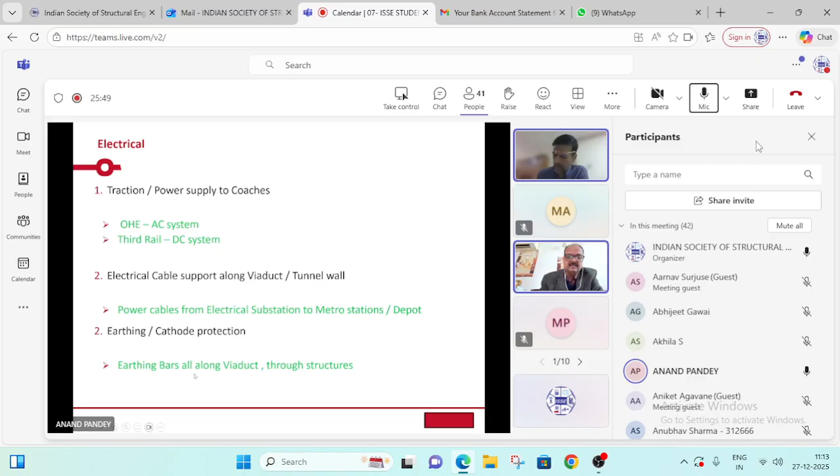Then S&T is signaling and telecommunication. Signaling is important for red green lights allowing the operation, and telecommunication for any issue - communication between the train operator and central command is very important.

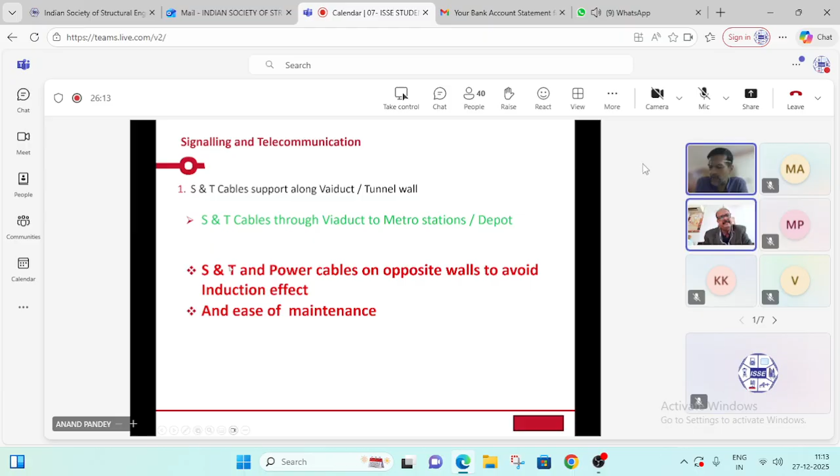One important thing: signaling and telecommunication and power cables run on different walls. I will show you in a picture. Signaling and telecommunications is low voltage, millivoltage and micro voltage, so it will run on one wall. Then electrical power cable, which is 110 kV, 33 kV and something like that, will run on a different wall. That's how the power is carried, and it helps in operation and maintenance as well as safety.

And it doesn't create induction effect, because 33 kV would create induction effect for signaling and telecommunication. Even in the station, the two rooms are kept minimum 10 meters apart.

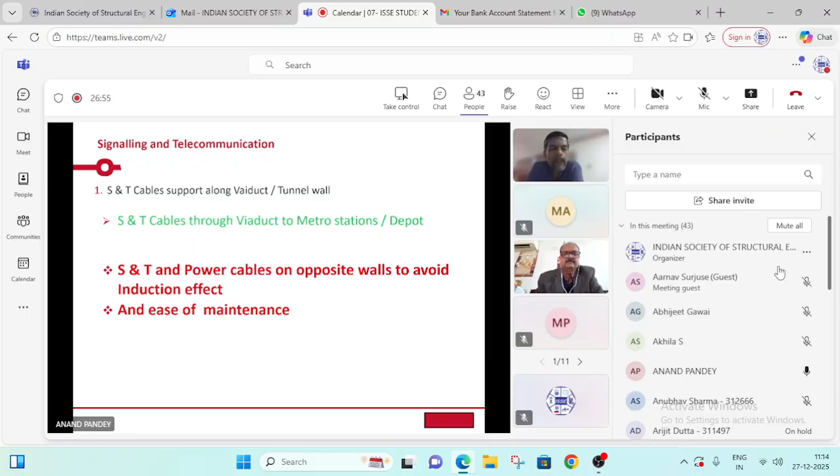And there is a 600 mm clear distance between wheel and any object. That also is very important - I will show you where. If due to any accident somebody is falling and the wheel is here, then this distance has to be 600 mm, so that even if somebody is trapped, it's safe.

You should remember, anybody needs 560 mm. Manhole is kept at 560 mm. 600 mm is for the person, for anything.

So this is a brief overall introduction to the metro, then I will come to the topic of underground metro. Now that's how an underground metro looks like. Now you people are lucky, you might have seen and traveled in it. When we started working on this, we had never seen it.

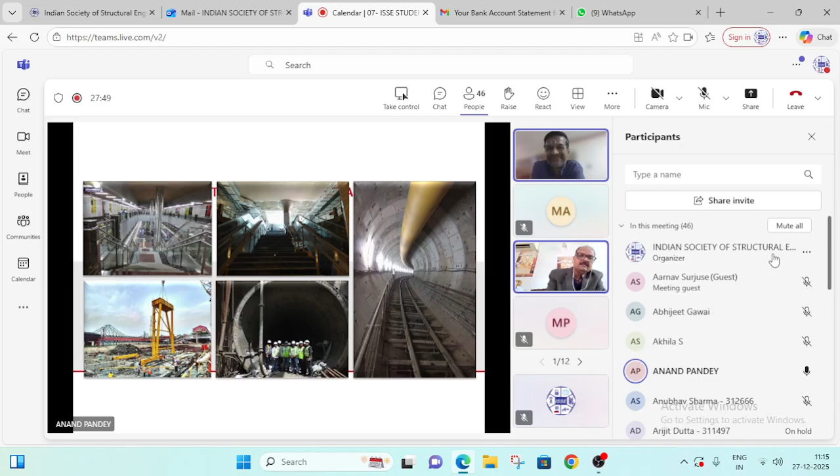So this is the TBM tunnel - it is the mechanized tunnel. You can see the segments of the TBM tunnel. Then the track is ballastless. This is the construction going on in Calcutta Metro. You can see the Howrah Bridge - that is the actual construction site.

These are the stations - from the concourse it is going to platform, and it is coming from concourse to platform. These are the people who are involved in the construction. Some photographs.

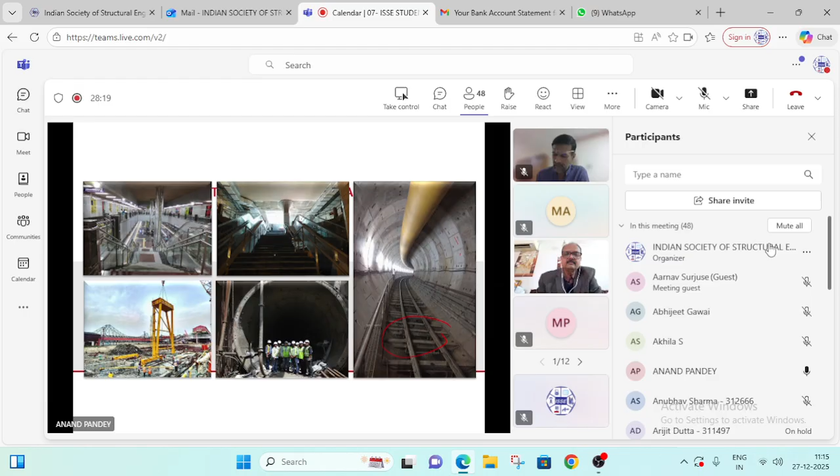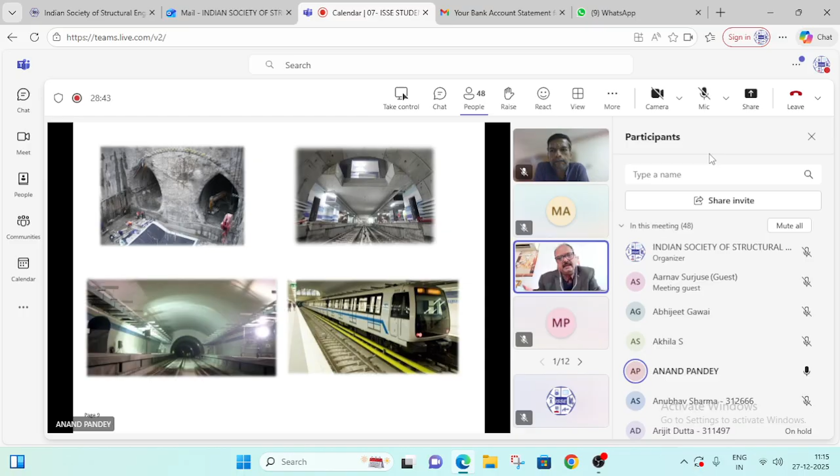So this is the thing. You can see the conventional tunneling and mechanized tunneling, which is normally called TBM, and this is called NATM conventionally. These are the stations created by tunneling method, and these are stations created by the normal cut and cover method. So stations are created by tunneling, by enlarging the tunnel, and by cut and cover also. That will explain.

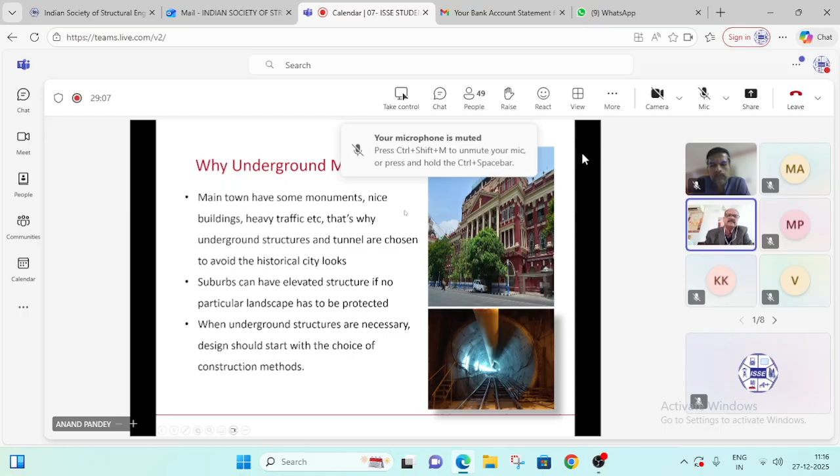Why we need underground metro and when we need elevated metro is a very important aspect to understand first. In the picture you can see this heritage building of Calcutta, the Writers Building. There is a tunnel created just next to it. I have chosen this photograph intentionally. Main town areas have monuments, nice buildings, heavy traffic, etc. That's why underground structures and tunnels are chosen to avoid spoiling the historical city look.

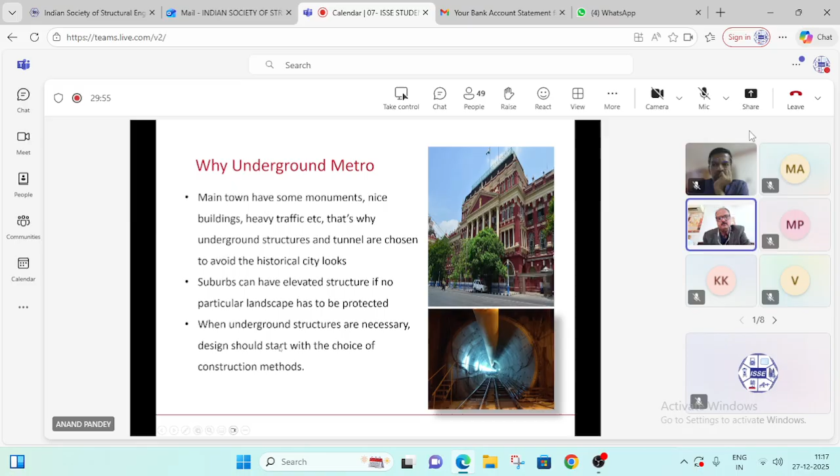During construction there are difficulties too, you lose space, and there are environmental aspects as well. That's why in congested areas underground structures are chosen. Suburbs mean a little bit outside the core city. You can have elevated structures if no particular landscape has to be protected. When underground structures are necessary, the first and most important thing is choosing the construction method. So after this broad introduction we will focus especially on the construction method.

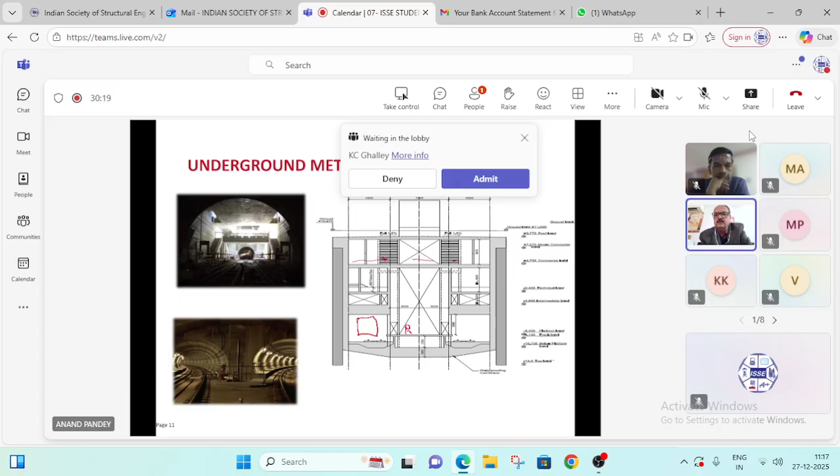Now this is a typical underground metro. The coach will be here, this will be the platform, people will be standing here. Then this is the concourse level here. It is different from the ground level, the roof level and the concourse level. Concourse level means where people enter, take the ticket, pass the entry gate, and enter the paid or unpaid area.

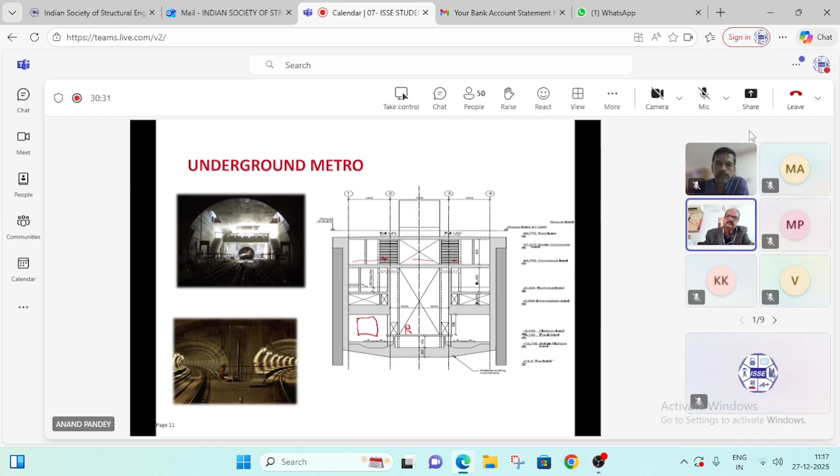In a metro tunnel, at a particular train, normally 1500 to 2000 people are sitting, and similarly a few hundred to a thousand people are waiting outside. So safety is very important. How is safety ensured? That's why power supply and distribution is very important, communication control security system is important, lighting, ventilation, heating and cooling, fire protection, water supply and wastewater are all important.

Imagine a situation when the train is coming and somehow catches fire, and it comes onto the platform where already a thousand people are standing, and the train itself is full of 1500 people. If the train stops here, then out of 2000 to 2500 people, everyone has to leave the station, evacuate the station within minutes for the safety of every individual, in case of fire or earthquake or something like that.

So every system in the metro - staircase, escalator, safety, everything - is designed to evacuate the whole 2000, 2500, 3000 people within 5 minutes. Every system has to start working automatically - the water sprinklers, fans to control the smoke, and everything. So that is very important.

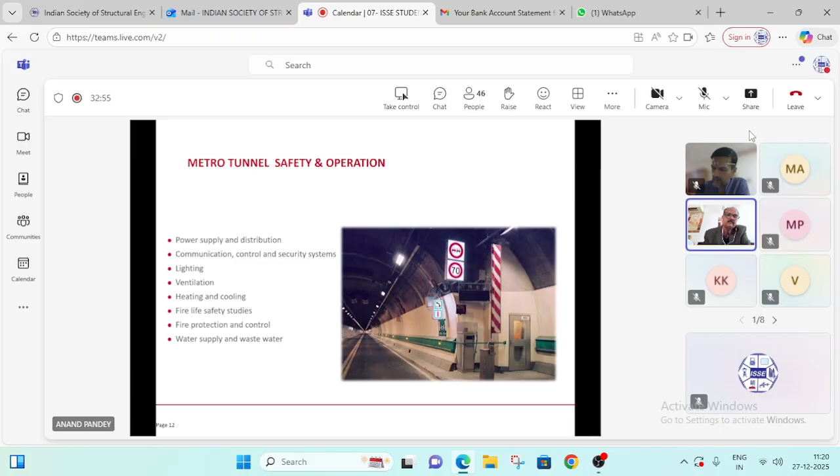Now in station planning, alignment is the first important thing. Normally it is kept on the straight alignment. Standard gauge or broad gauge coach is chosen at the start of the project in any city. Then, if it is a wall, how much clear width has to be from the train - this is the system requirement, that is traction, power supply to train, signaling and telecommunication. Then mechanical electrical services - air conditioning services, electrical supply, plumbing, fire.

Then egress calculation, what I was telling you - that 2000 to 2500 people have to be evacuated within 5 minutes. This is called egress calculation. There is a code, NFPA. From that criteria we have to calculate that all the people are evacuated through escalator or staircase within 5 minutes to a safe area. Then contract provision, employer's requirement - many things may be employer's requirement. Location, site visit, constraints, and technique is the construction method. So these things are important.

Now I will show you a typical section of the underground section. See, this is below the ground. It is normally 3 to 6 meters.

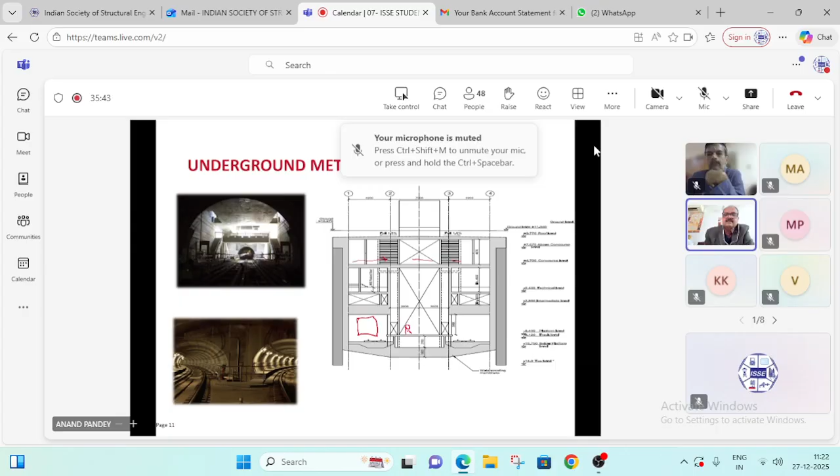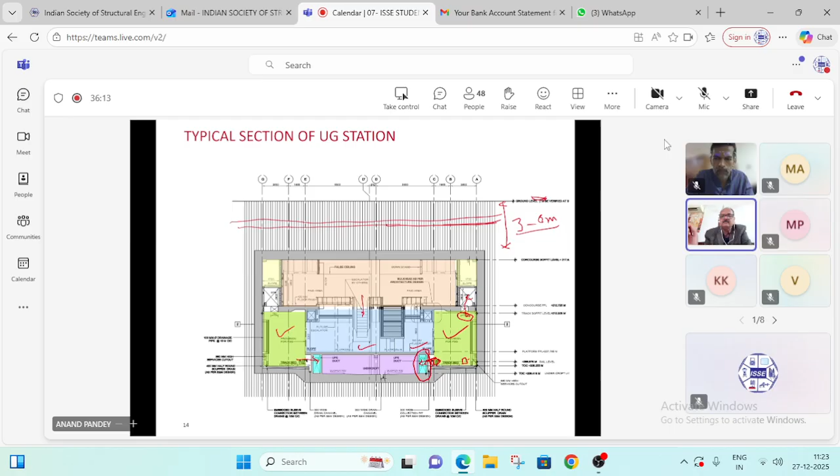In electrical systems, there is a pantograph on top. You can see this pantograph dragging against the wires, so it generates heat. This heat is also immediately taken out. We don't want the station to absorb heat - one heat from friction is immediately taken out, one heat because of traction is immediately taken out. So these two, we call over track exhaust system and under platform exhaust system.

Then under the platform, there's a lot of space. This is not wasted space - lots of cables: electrical cables, power cables, signaling, telecommunication, fire, water tank. The person has to stand here for maintenance, so this clearance has to be minimum 1.5 meters. So these things we see are complications.

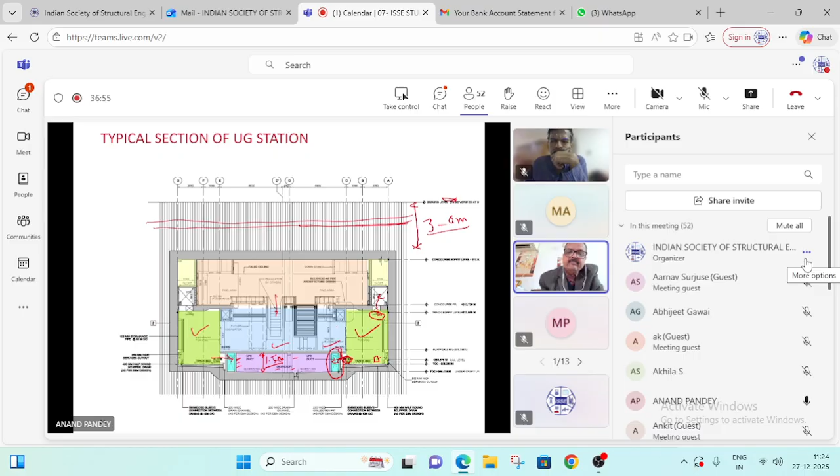As a user, you don't see this, but as an engineer, you have to see all these aspects. So traffic has to pass, sewer line has to pass, all heat has to be extracted so air conditioning doesn't get overloaded, and the public goes like this.

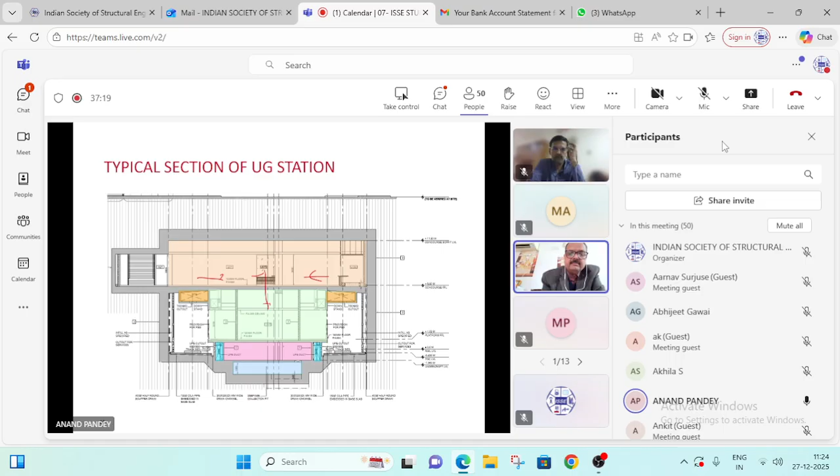Now this is a section from a different place, so people are entering from the ground to this part, then coming to the concourse. Then from concourse, they go from unpaid area to paid area, then come to the platform and board the train. Here you can see the overhead track exhaust system (OTE), UPE duct, and these are the cables. And these are sumps - seepage collection sumps.

There will be sewerage water and everything will be stored here. Now at concourse level, you can see the equipment technical rooms. There are a lot of equipment coming - air conditioning fan, transformer substation, signaling room, telecommunication room, everything is doubled in size and put here. Then this is the paid, unpaid area where people enter the station, take the ticket, then take entry.

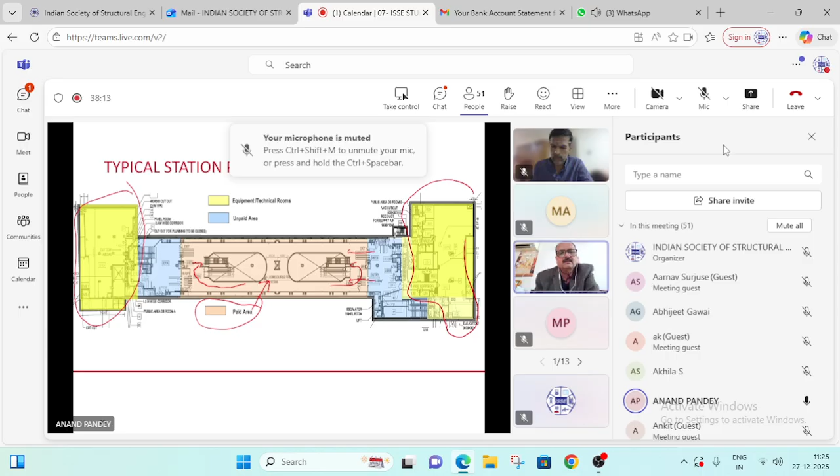This is the color given - they come to this paid area. From this paid area, they go down to the platform to board the train. So the end of the stations has all the technical rooms, technical facilities where electrical and mechanical are very important. Pedestrian movement, architecture and look are important, and the backbone is structural engineering.

Then at platform level, it's all paid area, but technical rooms remain here. Technical rooms are on two levels - on top, we generally put substation, signaling, telecommunication. Here we put a lot of things related to tunnel ventilation system. Tunnel ventilation is very important.

If there is a fire in the train between two stations, the train will be in the tunnel. So from one side you have to extract the smoke, other side you have to supply fresh oxygen. I will explain that part also - very important aspect.

Then under the platform, you see a lot of ducts - the UPE duct zone, as I explained. Then under platform area, there's cable routing. Sumps are there, escalator pits are there - so many things are there. And this is the sump and sewage pit, you can see.

Water supply, sewerage, air conditioning, electrical high voltage, low voltage, signaling, telecommunication, UPS, battery system, building management system, self-operation, and smoke extraction, space for entry of fireman - all is very important.

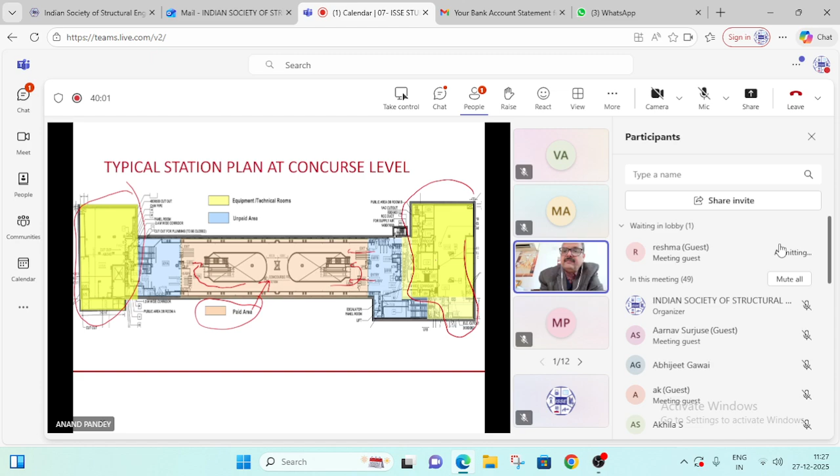The planning is done in such a way - you see this is a fireman staircase. If the public is evacuating from a particular staircase or escalator, the fireman doesn't have to enter from the same staircase. Separate staircases are provided for firemen to enter and provide support, because if the same place has public coming out and fireman also going in, how will it work? It will not work.

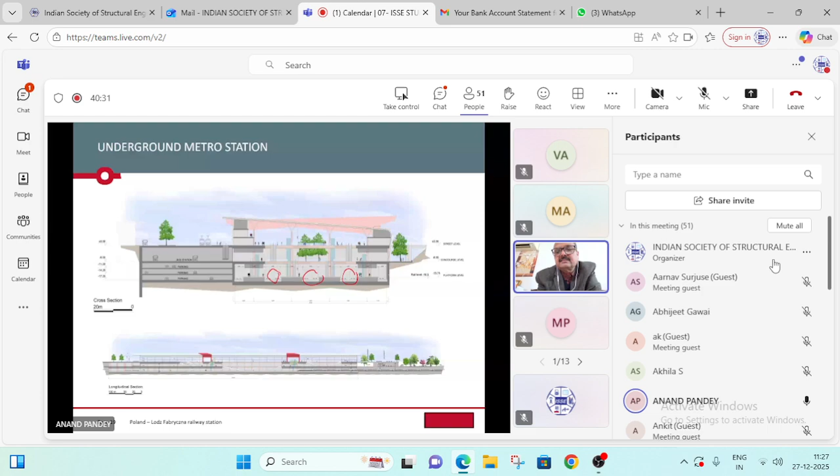Those kind of things. So I have taken this picture. So this is a huge station. So you can see this is the concourse level where the paid and unpaid area people will enter. This is the street level or road level, then platform level and under platform level.

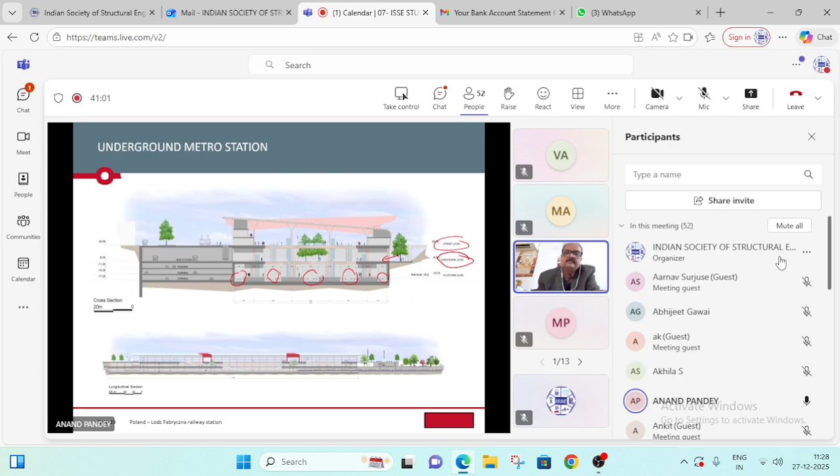Then what I was discussing, the safety issue, SES, smoke extraction system. If there is a train in the tunnel and there is a fire, then the system has to operate so that on one side smoke is extracted, on the other side fresh air is brought in. Because in a fire, death takes place mostly because of smoke rather than fire.

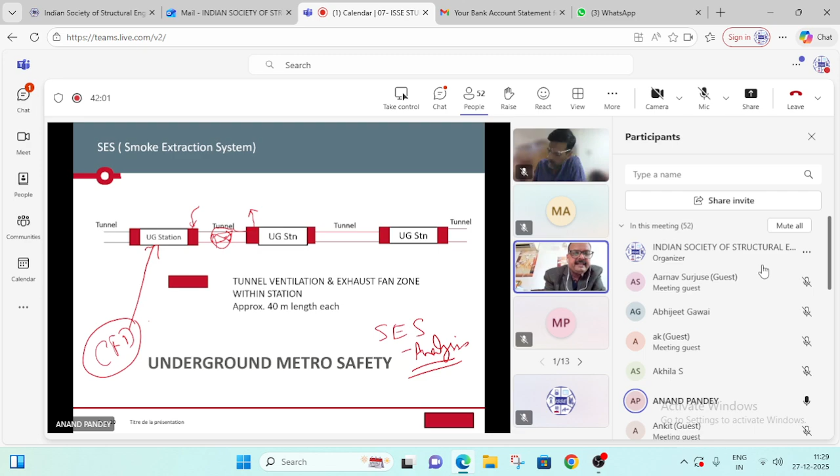So we call it smoke extraction system, SES analysis. This is a specialized field of mechanical engineering. Softwares are available. SES analysis, and there is something called CFD analysis, computational fluid dynamics, which is how in the station you maintain the atmosphere temperature,

humidity, which is the normal air conditioning system we see in the buildings or everywhere. That is CFD. But the tunnel extraction system is different. So for safety and maintaining the ambience and environment, this mechanical engineering aspect is very important.

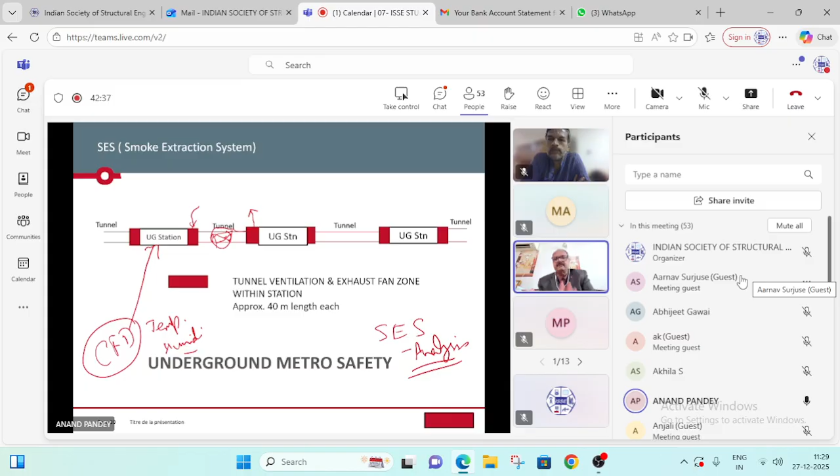Now, that's how we tried to explain the safety aspects, primarily safety and functional aspects of the metro, so that you get a feeling of everything. That is very important. If any question on that, I would love to take that question, because then I will go to the construction method. Or, Vivek, we take the questions in the end only? Yes, sir. We'll take them at the end.

Okay, fine. So now I am coming to the hardcore civil engineering part, where structural engineering and geotechnical engineering need very close coordination, and both specializations are important in the construction method of underground metro. Normally in buildings or bridges, we first construct the foundation, then the ground floor, then first floor and second floor, and like that. We call it bottom up construction. We start constructing from the bottom and go up.

But in underground, somebody's mic is on. Please switch off mic.

Thanks. So that is the bottom up construction. But in underground, there are two types of construction. One is bottom up construction, the other is top down construction. Bottom up construction means we first excavate the whole area, then we start constructing from the base slab. First we construct the base slab, then we construct upper slabs and those kind of things.

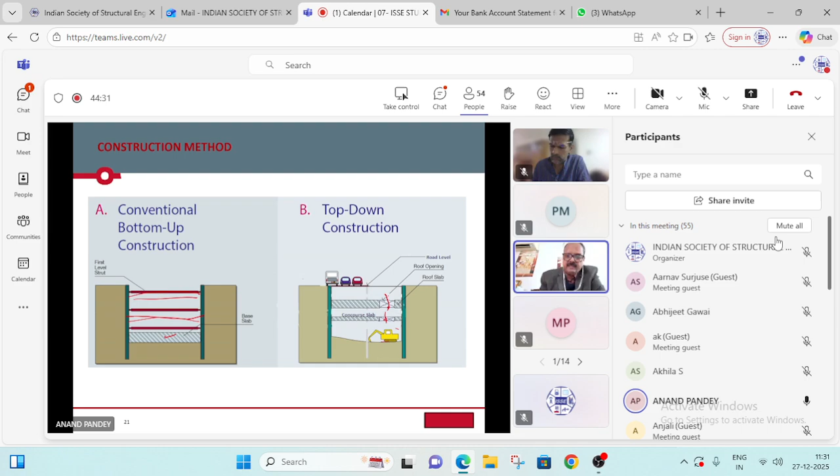Top down construction, we start excavating and first we construct the top slab, then we construct the mid slab. Then see, in the end, two slabs are already cast, but excavation is still going on. See, the machine has been brought inside from here. People, machine, everything is important, and the base slab will be constructed at the last. I will explain in detail. So, construction method top down.

With this we have the earth retaining system, which can be diaphragm wall, soldier pile, sheet pile, or secant pile. I will show you pictures. And then we put piles to counter buoyancy. One thing a construction engineer, civil engineer, has to understand: these piles cannot be constructed after construction. Machine cannot go. So the decision of constructing piles has to be taken when the ground surface is normal. You have to construct the piles.

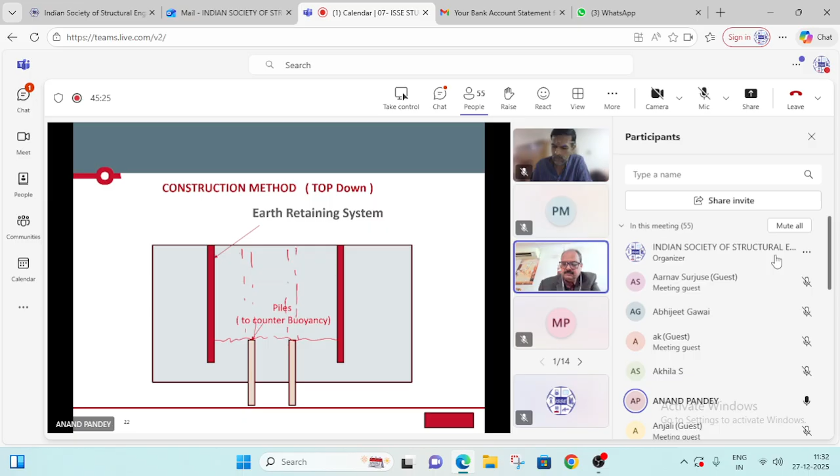Casting of piles has to be done up to this part, but boring has to be done for the full part. Boring is done for full depth, but concrete is done only for this part. And these are the earth retaining systems. After this, we'll excavate this part and construct the first slab. Then further we'll excavate the whole thing. This is there, and we'll cast this.

The next step, we'll excavate the whole thing. This is already present, and then we'll cast this slab. That's how we come top down. First cast this, second stage cast this, third stage cast this.

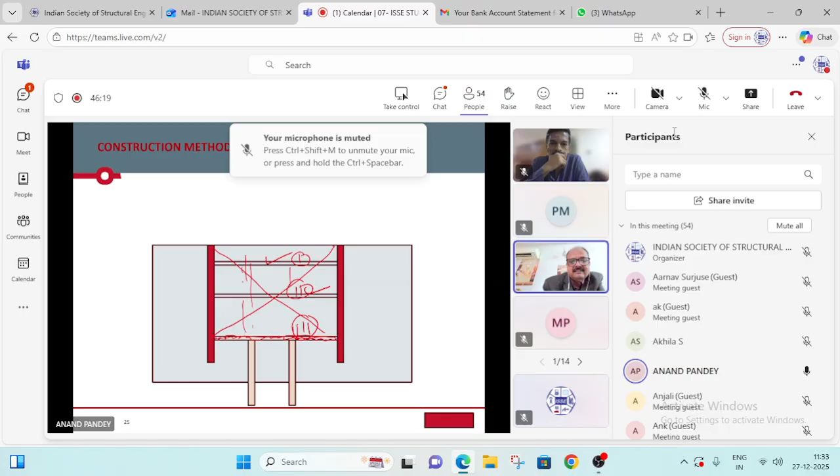And see if there are columns. Columns have to be cast. Also, the dowels have to be left, and the columns also have to be constructed like this. So it is completely different. And many times parkings are also constructed like this, underground parkings.

So in retaining systems, in top down, the diaphragm wall is the most common. At least in India, it is generally the only one used as temporary as well as permanent works. So diaphragm wall, how we construct it: it is, you can say, like rectangular piles. A diaphragm wall is nothing but rectangular piles. So what we do, we excavate one panel. The size may be 2.8 to 5.6 meter length, like this.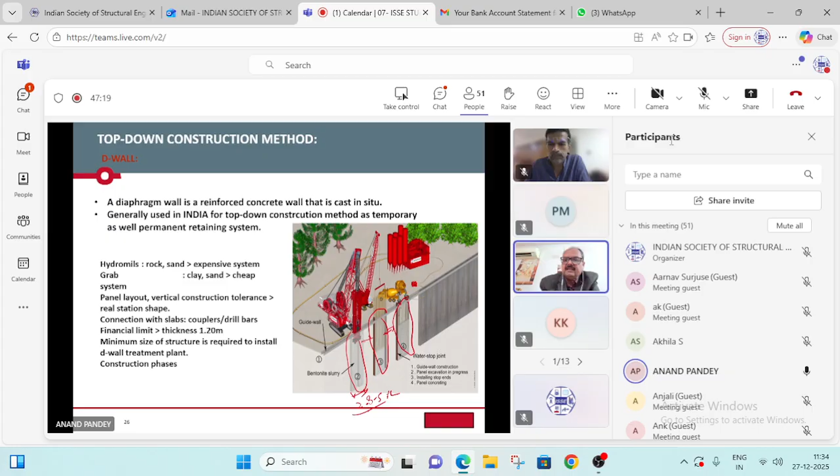We construct one panel, then we leave the space, construct a panel. So alternate panels are constructed, then the in-between panel is constructed. A male female joint type of thing comes. Like one panel is cast like this, and the other panel is cast like this, and a waterproofing element is provided. So we call it a male female joint. So the diaphragm wall is constructed like this.

That's how bonding is created. There is no continuous reinforcement, only waterproofing. It is only a locking which retains, no reinforcement, no continuity. So each wall acts independently in design.

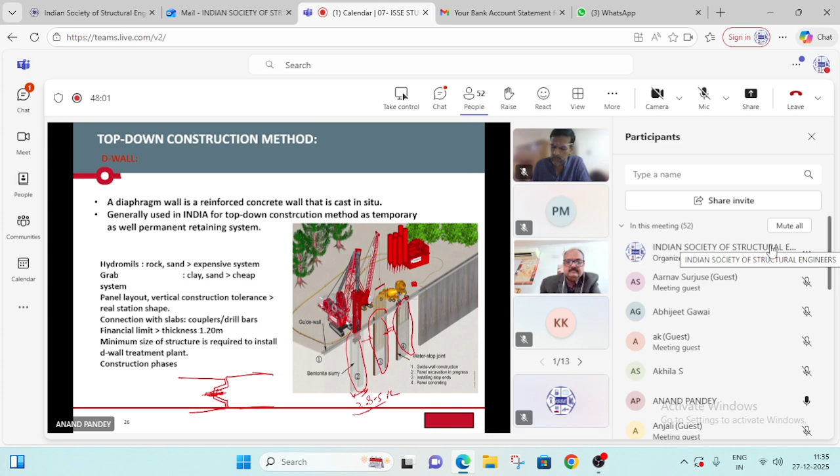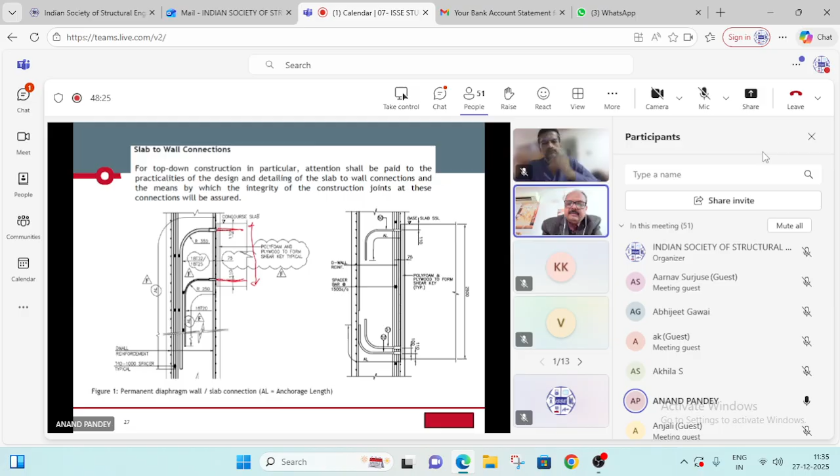Now, since the wall is constructed, how will the slab get connected? So we leave the coupler bar and we cast the slab. This is the slab. From there we attach the reinforcement of this slab. We call it coupler bar. This is an important aspect. You can see the coupler bars in actual photographs. These are the coupler bars.

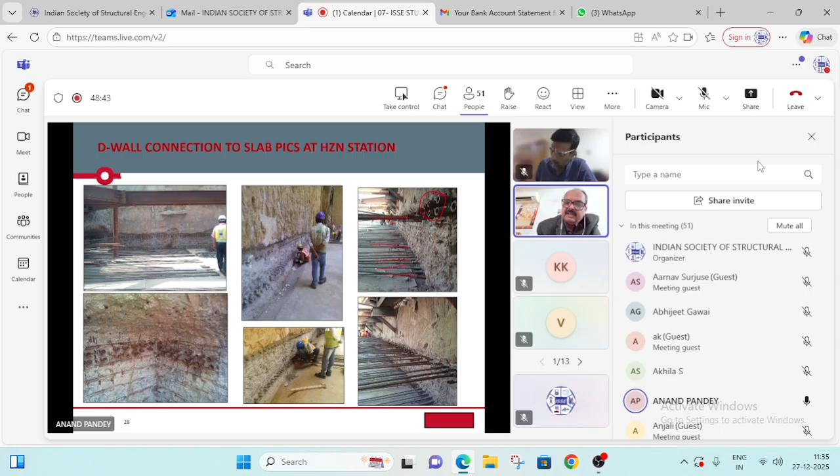After excavation, we have found this coupler bar and we are attaching the main reinforcement bar of the slab like this. If you see now, the accuracy is so important. These are the coupler bars. The diaphragm wall you are constructing from the top, and you can't have an error of more than 30, 40, 50 mm, because the coupler bars have to be found exactly at the location of the slab.

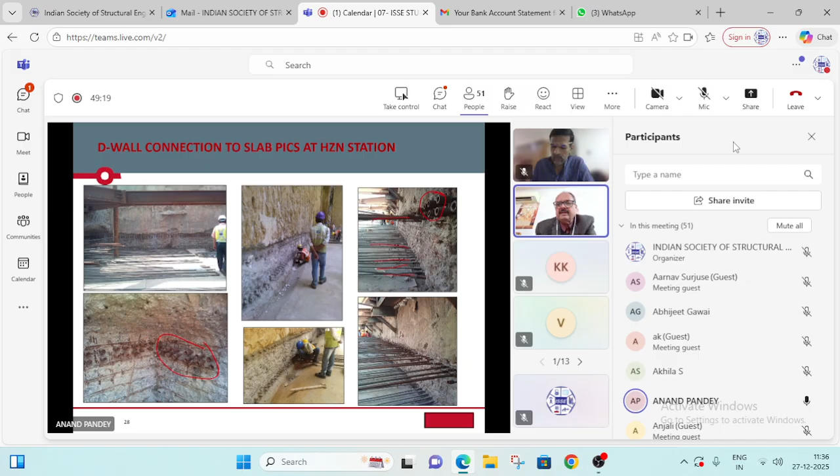If you don't find them at the location of the slab, you will be forced to drill new holes, which is a very tedious process, cost, time and material consuming. That is very important. Very good accuracy is required during construction. Even the verticality is very important.

See, if somebody is constructing like this, then what will happen after excavation? How will the train run? No space. So vertical accuracy as well as the location of couplers, both are very, very important. So this requires very good skill of the people working on site.

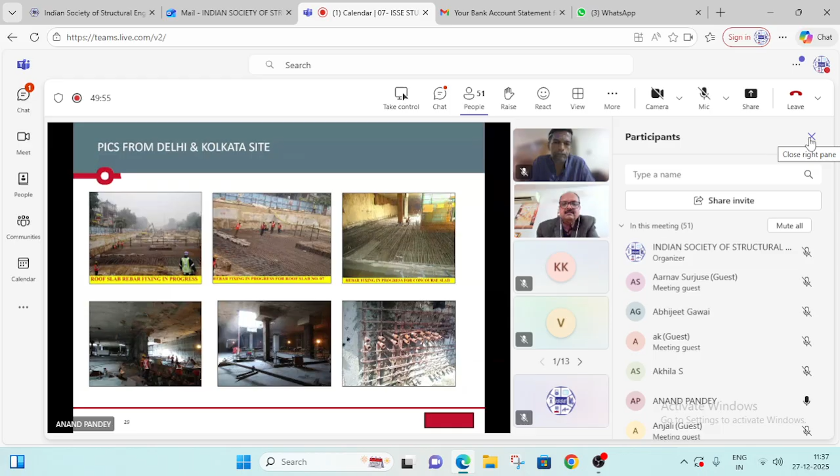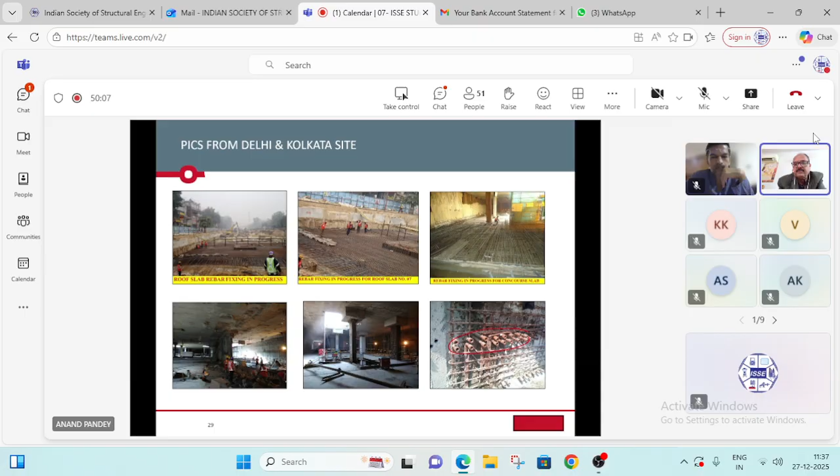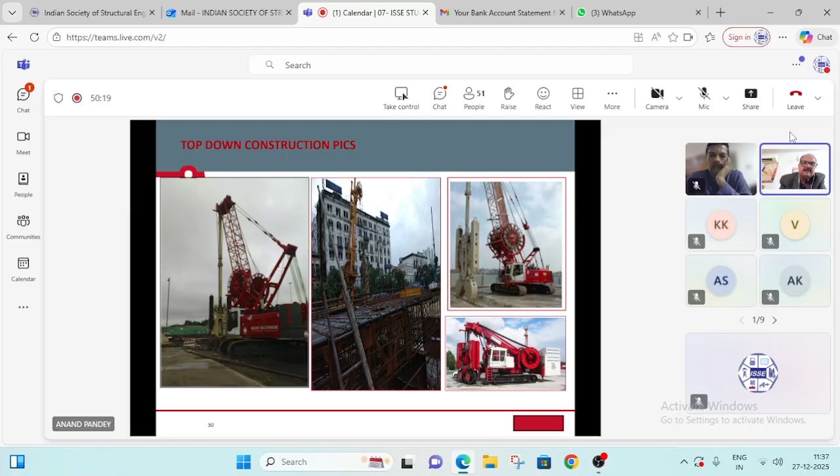See, this is a top-down construction picture. This is the hole created to bring down the machines, equipment and many things. You can see the couplers here. Now this is the actual site photograph where top-down construction is going on, diaphragm wall excavation is going on, the cage will be brought down and this will be constructed.

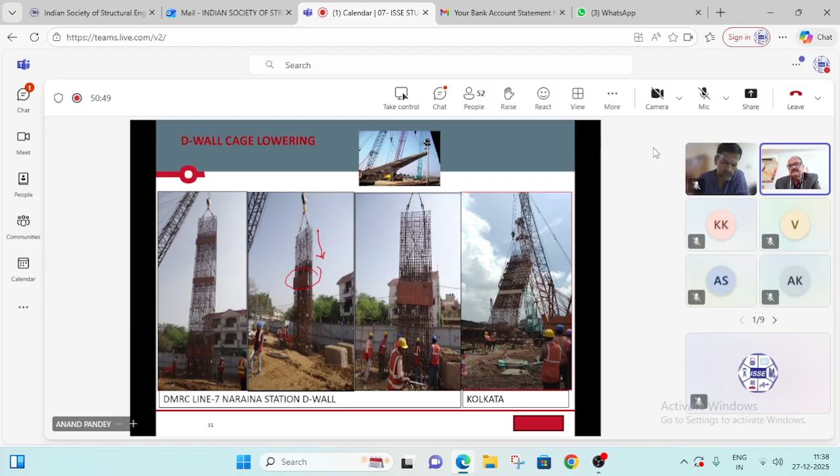This is the photograph taken from DMRC Line 7, Naraina Station. This is from Calcutta Metro. You can see the cage, huge, how many tons of steel cage you have to lower, and vertically it has to be perfect. And the coupler location has to be perfect. Hardly an error of 25 to 50 mm is allowed at 18 meter, 20 meter, 30 meter depth.

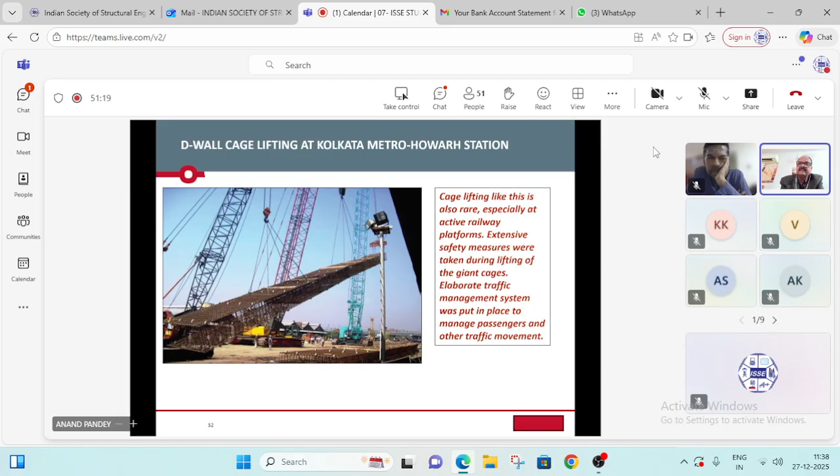See how many cranes are involved. Cage lifting like this is also rare, especially at an active railway platform. Very close to the active railway platform. Safety measures. See, if something goes wrong, nothing will be left.

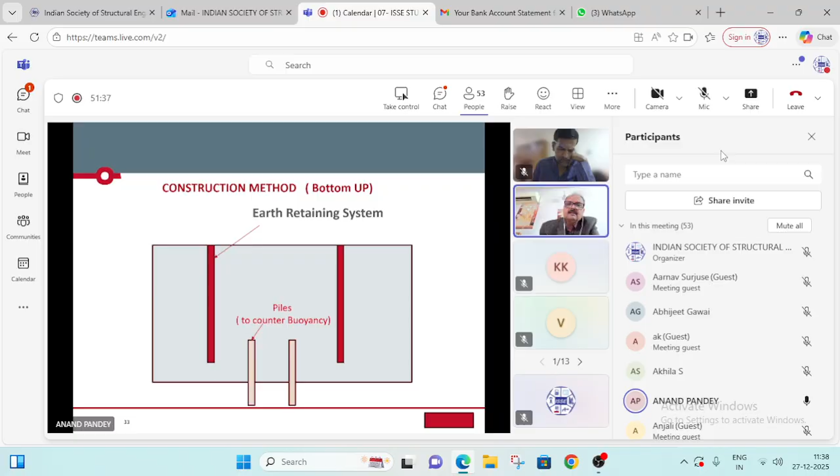Now coming to the bottom up construction system. The earth retaining system remains the same. Piles also remain the same. But what we do, once we start excavation, instead of a slab, we put temporary support in steel. We put steel and excavate. Then again, we put another steel system and keep excavating.

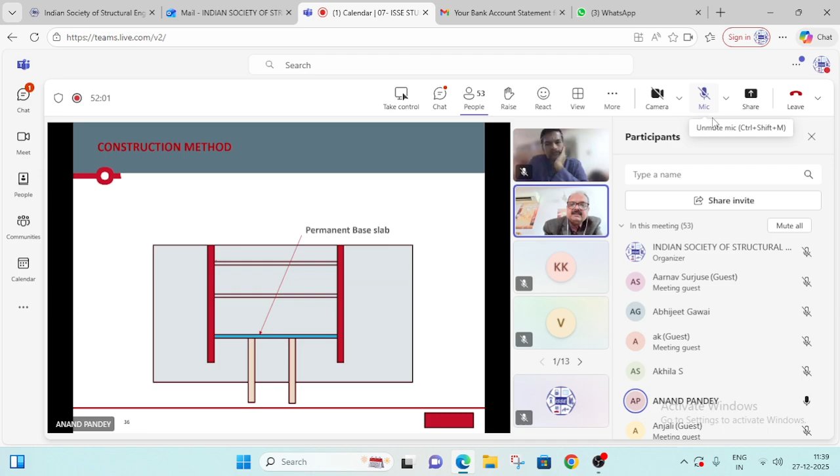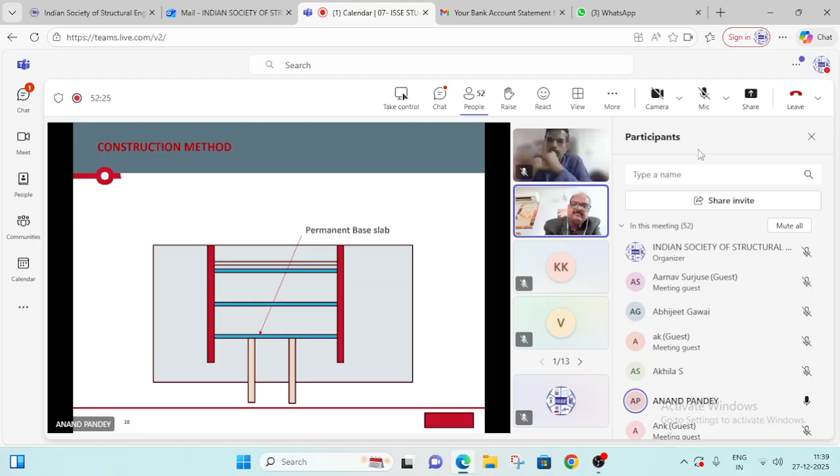Then after this steel support system, the excavation is complete, then we cast the first slab. The first permanent base slab we cast. Construct the columns required, then we cast the next slab. Then go up, then cast the next slab. Like this. Next level slab, and keep removing the steel support system, walers and struts.

Normally, in bottom up construction, we don't use diaphragm walls. Diaphragm wall bottom up is generally used when it is not on the road, it is in a park, in open land, or an area like this.

So one system is called the secant pile system, where piles intertwine. First we cast one pile like this, another pile like this. We call it soft pile, only PCC. Then we cut through these piles, and finally cast this RCC pile. We call it hard piles. So soft piles and hard piles, and it creates a watertight system. See, this is what we call walers and struts. The waler is running and the strut is that.

And here you don't have the problem of coupler and base slab and something. You can start constructing fresh. So here excavation is different, but the casting and controlling of the slab and those things are much better, because you are casting later, so you can control it.

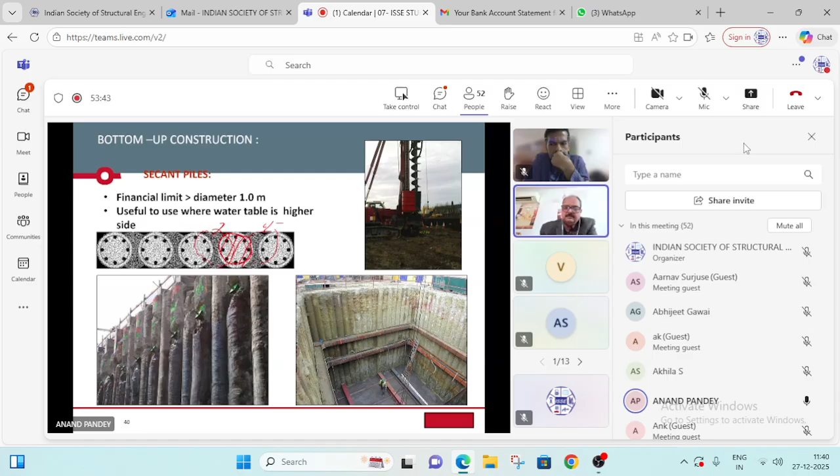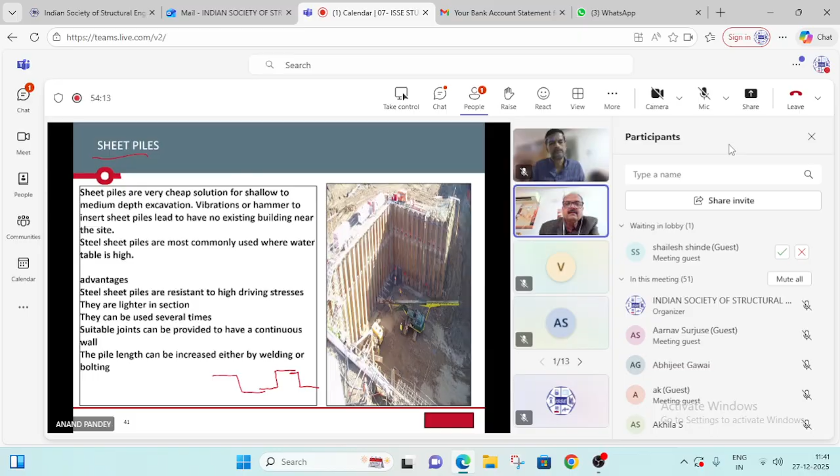This is sheet pile. Sheet pile is what? These are the Z shaped sheet piles which are intertwined with each other. Steel sheet piles. And the thing is that steel sheet piles, after the construction of the station box or tunnel, we take these steel sheets out and use them in some other project. And this is a watertight system. If there is water outside, you can use it. This is an actual sheet pile photograph. You can see Z shaped sheet piles used at Nizamuddin station.

Hello. So you can see these struts. Am I audible? Yes, sir. You're audible.

Okay. So these are called struts, and these are called the walers, running members, which are acting as the beam, and these are acting as the horizontal columns. Horizontal columns and buckling, etc. are involved. Okay, and sometimes we use anchors.

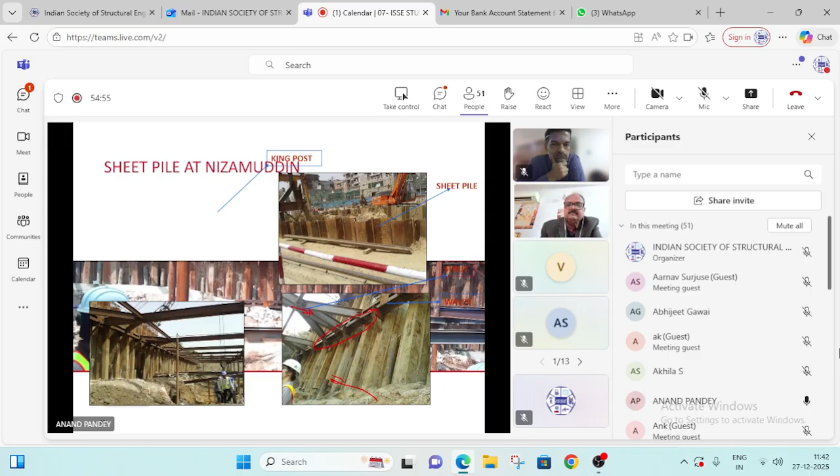These are called soldier piles. Soldier pile is another technique where you use steel sections like this, and then you fill this gap. You can see this gap. You put concrete or a timber plank. This is not a very watertight structure; where the water table is at depth, not at ground level, you can use this system also. This is famously called the Berlin Wall also. The East German, West German Berlin walls were also created by the same technique. So we call it Berlin Wall also.

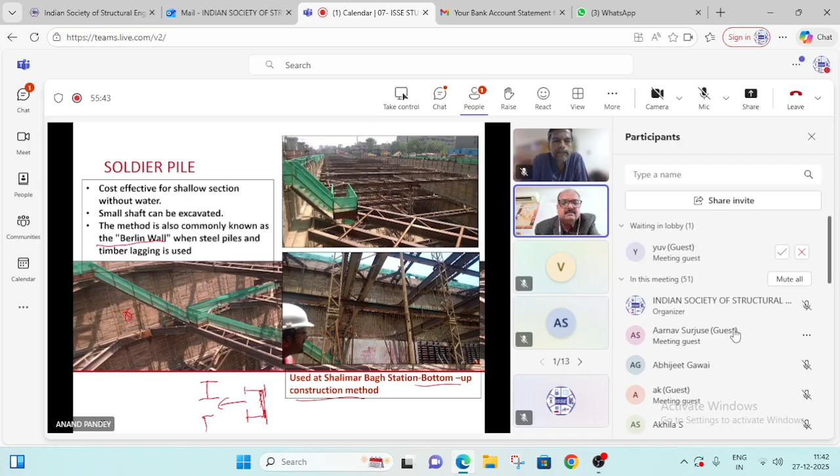So this is the actual photograph from Shalimar Bagh station, bottom up construction method. So this is used like this. This is a photograph of a waler and strut excavated system, and this is the final product of the underground metro station. So that's how top down and bottom up, depending on the water table, depending on the soil and rock, depending on whether it is in a park, open area, or on a main road, and those kind of things. Everything is possible, depending on the cost and economics worked out by the contractor and the design team, which is working better.

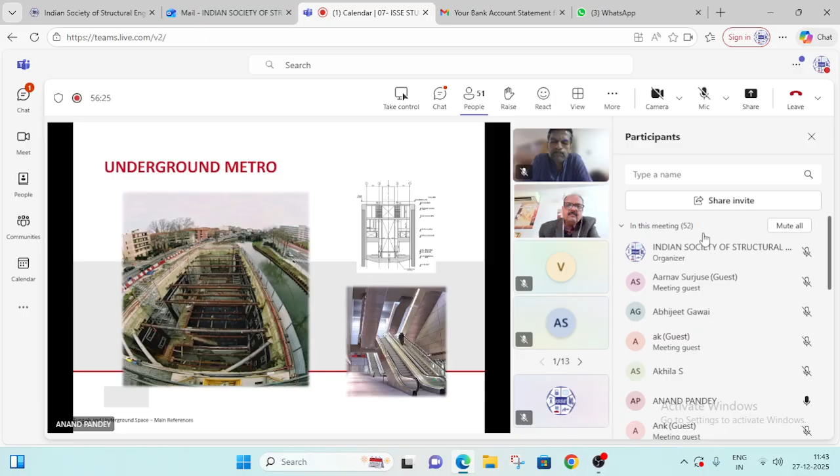Now, one of the very important aspects in underground is that whenever you construct something, whether station or tunnel, when you are constructing this, you are taking out the soil. Volume loss, we call it volume loss. The moment you take out the soil, the existing earth pressure gets deformed. So this ground will deform. The top surface will also deform. Laterally, the ground will also deform. Water table is also there.

So the safety of the existing adjacent structures: they may tilt, they may settle, or the ground may move laterally. So when you are designing a station box or something like that, we carry out the geotechnical analysis. Here, the geotechnical aspect is very important. Now we use software like Plaxis and others to carry out the analysis, and we see that the settlement can't be zero, but settlements are within limits. Like if a building can tolerate a 25 mm settlement, then during construction the settlement cannot go beyond 25 mm. Similarly for the ground.

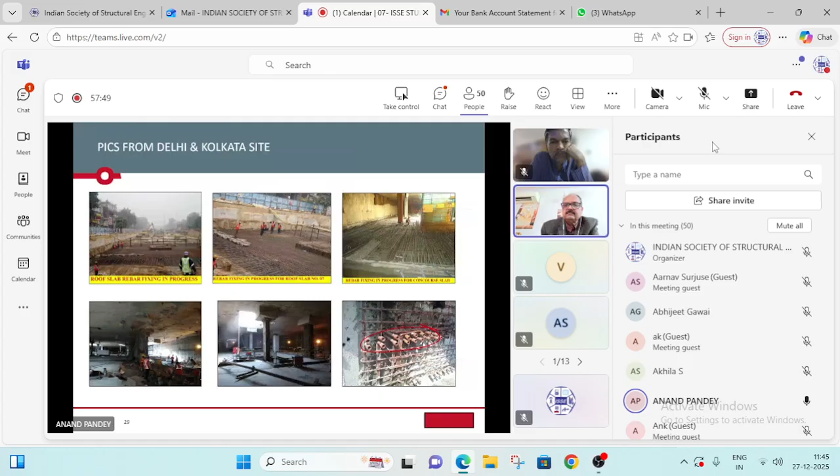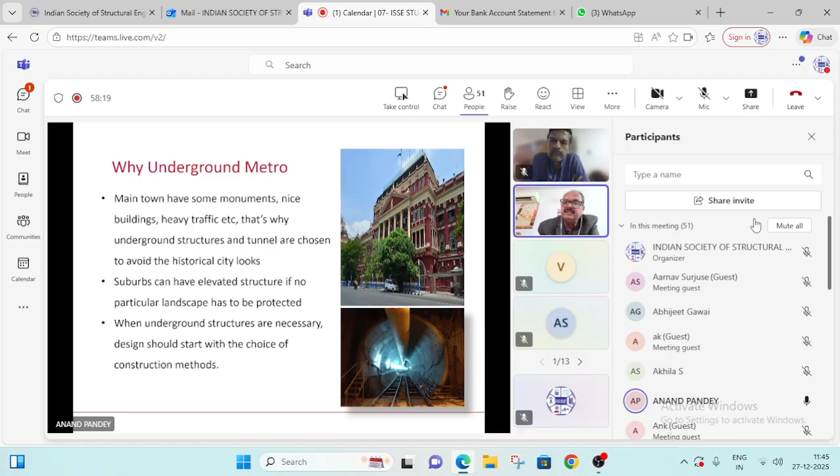So now if you see the photograph, I will show you how it is important. Now see the heritage building of Calcutta. There is a tunnel very close to it. During construction, this whole heritage building, ASI, is supported. It's a brick building, so you can't tolerate even 10, 20 mm settlement. So this whole building was supported with formwork and shuttering during construction, and the tunneling was done. So those kind of things have to be done. That's why this is very important. Sometimes it is very critical.

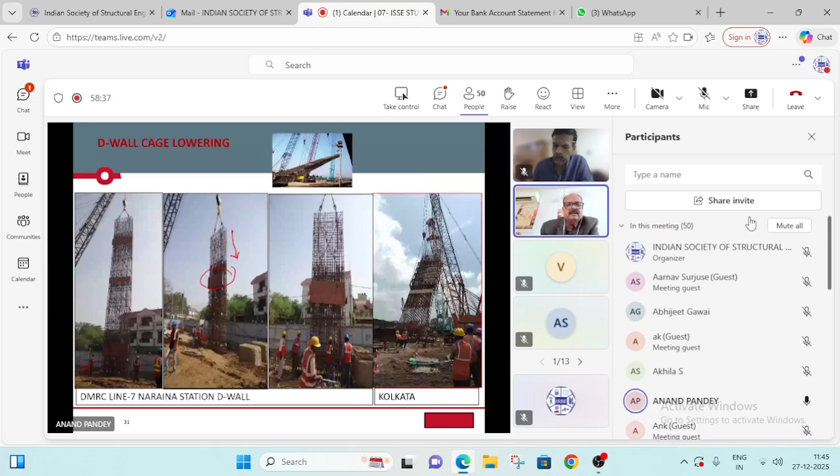Sometimes what happens, the tunnel segment is coming just under the building. So what we do, we dismantle the building, construct this, then reconstruct the building. That also has been done. It is being done. But if there is a pile foundation in the building, it's practically impossible to take the tunnel there. In Patna Metro, such a situation had come, and the tunnel was diverted. So when you are planning the alignment of the underground metro, you have to check the existing structures, and if your alignment is going under any existing structure, it should be on open foundation only, without basement and without piles.

Now, one aspect is the station, what we explained, top down, bottom up. Then the other aspect is the tunneling. Tunneling in an urban environment is mostly done by the mechanized method. We use the TBM, that is tunnel boring machine, and each complete circle is made of segments,

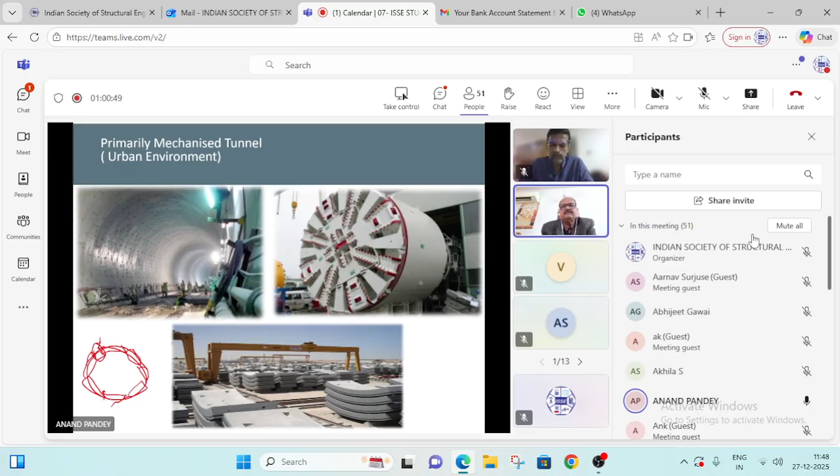So this is called the tunnel boring machine. The advantage of this tunnel boring machine is that the impact is very minimal. This is very controlled. Then in mechanized tunneling there may be hard rock tunnel, different types of machines. It is not the same machine. It depends on the geology. Is it hard rock, soft rock, only earth, clay, or sandy soil, water table. We have to choose the type of machine.

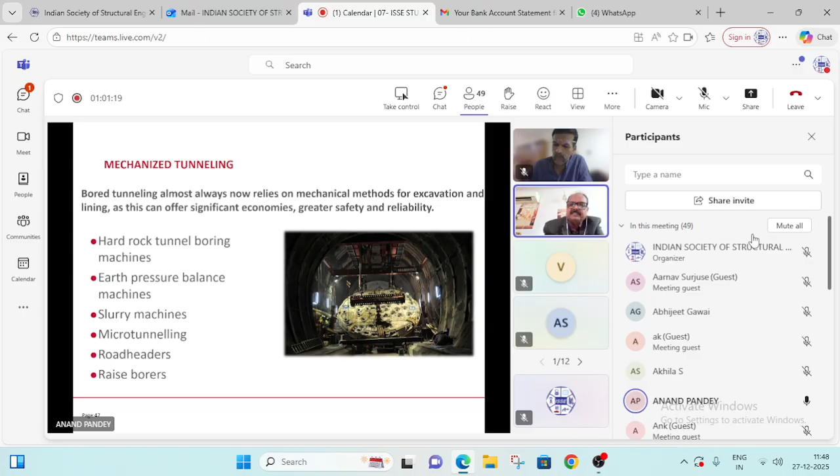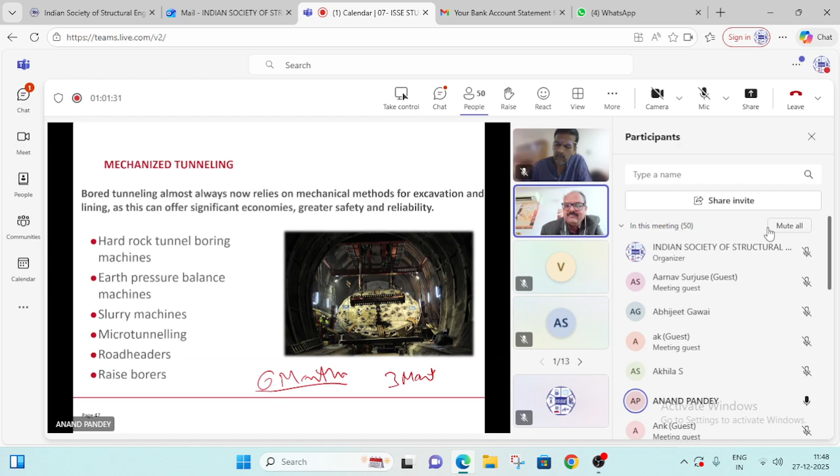The machine manufacturing itself takes 6 months. So if you decide to use a particular type of machine, 3 months you take for the order, 6 months to manufacture, then 3 months to install and supply to the site. So if you decide a machine type today in January 2026, you cannot start the actual work before January 2027, because the machine will be tailor made by the manufacturer as per your requirement.

It is not available in the market. It is a 50-60 crore or more costly machine, not directly available. If it is available from an old project coming to the new project, then the time will get reduced, which has started happening in India at many sites now.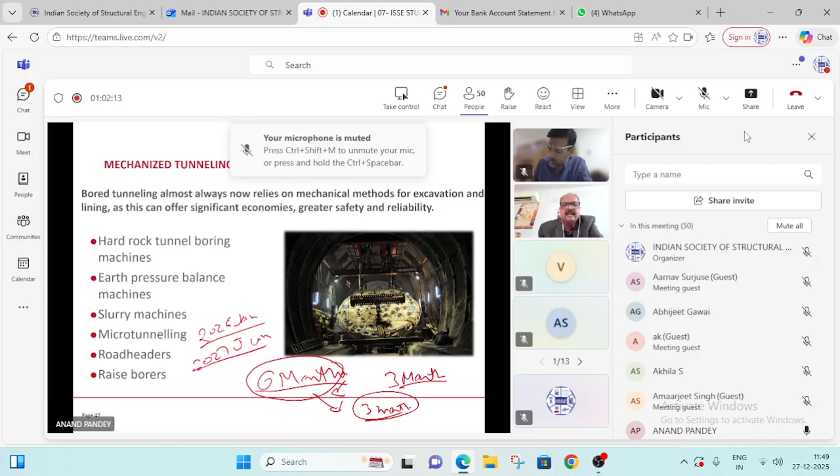Then conventional tunneling, which is also commonly known as NATM, New Austrian Tunneling Method. Conventional tunneling has been done mostly in dams: you drill, then you put the dynamite and blast it, and then construct the lining. In NATM, you construct the lining later. So these are two different technologies, and now consider the urban area.

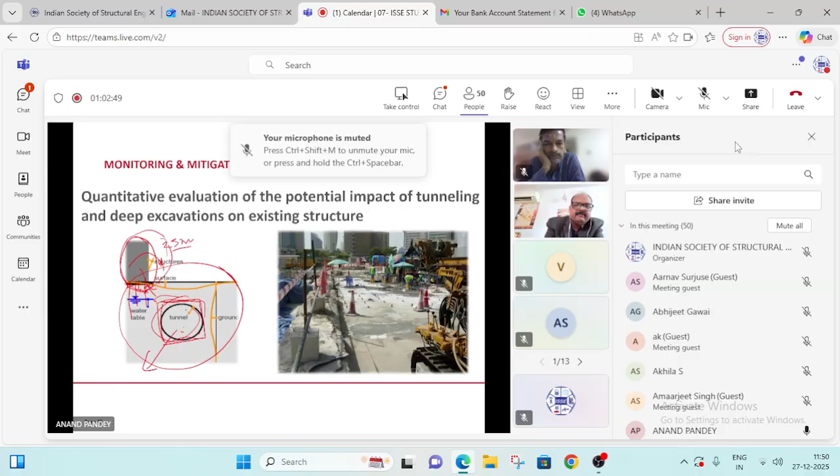If you blast, the impact will be very high. Not easy. In Himalayan geology you can do it, but it's not easy here. Even if you are doing NATM, you have to do the excavation with a very small charge.

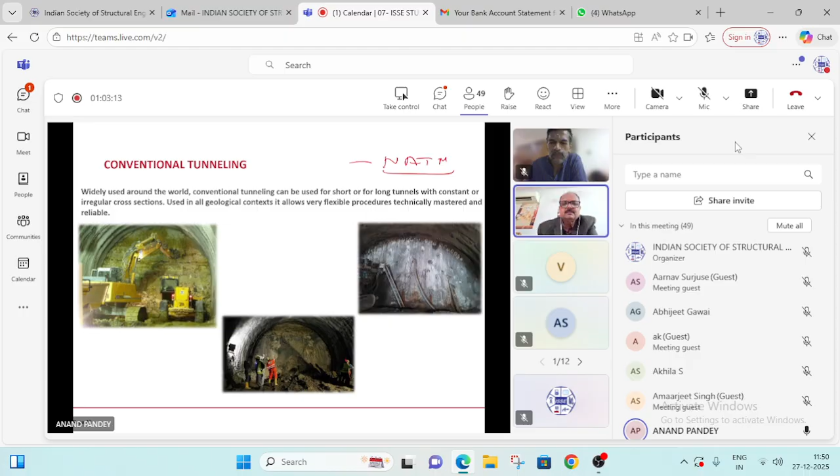So this completes the presentation from my side. My message to the young engineers: let's adopt robust, sustainable, efficient, economical solutions and not the cheapest solution.

Wow, such an excellent presentation in a very short time, sir. You took about 45 minutes. So, any questions, audience? Yeah, questions are coming. Let us take questions one by one. The first question Mr. Wakas has asked. He is asking how the ventilation system in metro is different from a road tunnel.

The road tunnel ventilation system is different. Okay, let me explain. If it is a road tunnel, what will happen? Trucks are coming, and one somehow catches fire. So primarily the smoke may go up. The fundamental remains the same: one side supply, one side exhaust. That remains same. But there are vents, many vents available. This is now provided.

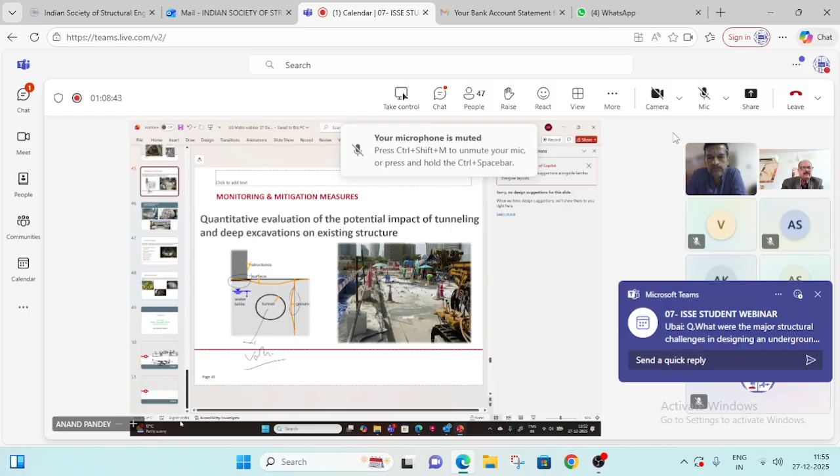The way you do it in practice: if this is the ground and there is a building or any kind of structure, you carry out the analysis of this whole ground. Normally it is within 50 meters. 50-meter length from center, we take the whole ground, carry out the analysis and get a figure like this. So we know exactly how close the building is. We put the graph and Plaxis analysis, and it shows how much settlement is coming. So that's how we do it.

First thing is that the TBM should not stop. That's the first precaution. Once the operation starts, the TBM should continue. If the TBM halts, there is a chance of settlement. So TBM operation from one station to the next should be continuous. And the second thing: in the tunneling, there are sensors available and instrumentation done. So for the next 60 meters, 90 meters, we keep watching whether there is settlement, and we keep getting information on the soil, any obstruction and the water.

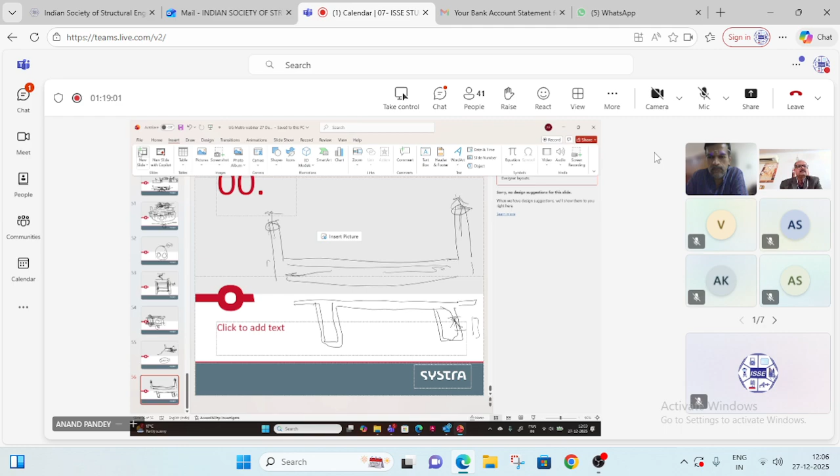There are two ways. If this is the tunnel, you create concrete, and that's why you use ballastless sleepers, like this. Then in those areas where the track is very important, the track is not simple - it has many varieties. One system is called MSS. Many times, if you have to control the vibrations, like when a train was passing very close to the Dhaka PMO office in Dhaka Metro, Dhaka Prime Minister's house, or some other sensitive facility, you need MSS, which means the track itself is created on springs.

The track is not simple - there are about 12 types of tracks used in metros. In railway, you might see a single type of track, but there are 10 to 12 types in metros. So track engineering, or civil engineering, is itself a specialization. There are various types: ballasted, MSS, spring systems, shock absorbers, rubbers underneath, and proper springs, which are very costly. You create a complete spring system on which the rail track is laid and the train runs. So sometimes a very costly system is used - this is complete track technology. There are 10 to 12 types, but MSS is the most commonly known.

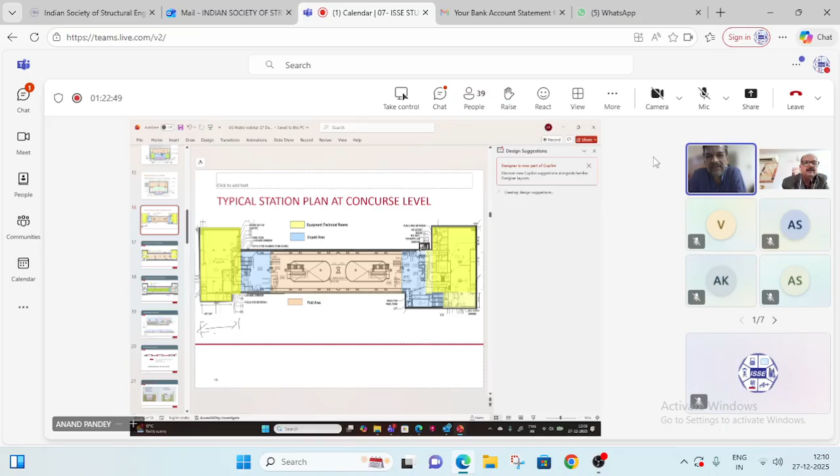Let's start with the functional detail. If you see this 40 to 50 meter length of the underground station, and this tunnel shaft,

once the train enters through the tunnel, it creates a huge air pressure or piston effect of wind, which also has to be absorbed. So we use tunnel ventilation fans to house tunnel ventilation fans and air conditioning fans, the HVAC system. These two are not present in the elevated station, which is why you can reduce 40 to 50 meters on either side - so if you add this 80 meters, 140 plus 80 gives the length of the underground station, about 220 meters.

That's why you don't need the tunnel ventilation and air conditioning system in an elevated station. But if you go to Dubai, you need an air conditioning system, so that length will be slightly higher since you create an enclosure.

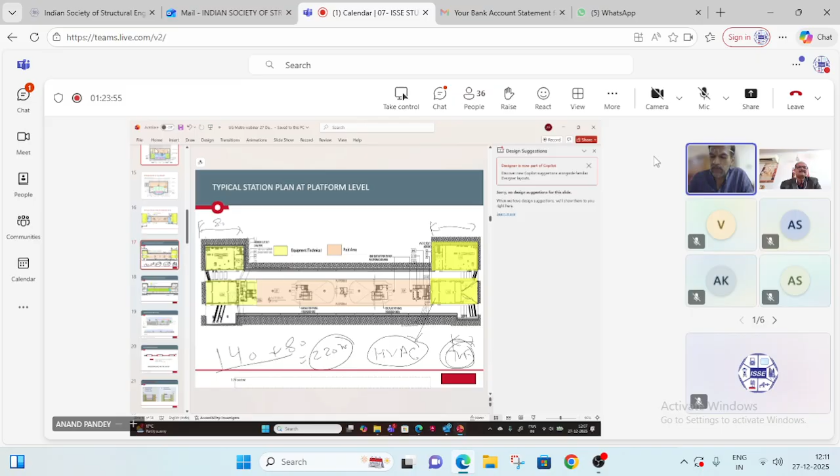There's a next question from Engineer Shailesh Shinde. He is asking: many times you mentioned that in India we only use diaphragm wall, whether for temporary or top-down construction. What advanced and economical methods are used in other countries for underground construction?

Actually, in many countries the temporary system and permanent system can't be kept the same - they take extra precautions. Especially in Denmark and similar countries, if a diaphragm wall is constructed for temporary use, they don't allow you to use it as permanent because they feel the quality control is not good enough. So they ask you to create another wall inside.

So we have to create another wall. Many times what people do is instead of a diaphragm wall, they go for a secant pile wall, because they know they have to create another system. So even for this, they generally don't construct top down. They go for bottom up, because they create a secant pile wall, then construct like this, and if it is in the middle of the road, they create a complete steel structure for the traffic to move.

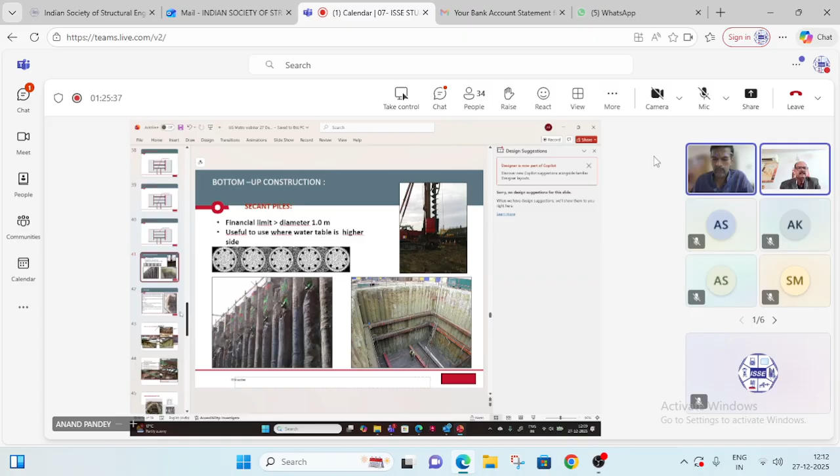That's how it happens. In India, I can tell you from real experience - I would not name the public forum, I would not name the station - because one station was designed by me only. In future, the next station came up. When this diaphragm wall was exposed, the reinforcement and concrete were not proper, meaning the 120 years design life was not sustainable.

This kind of system, the earth diaphragm wall with the internal wall, I have generally used on Hanoi Underground Metro. Hanoi Underground Metro has been used by Systra. So that is the precaution you have to take - you are ready to put more money considering quality and safety, rather than taking challenges. Like in our country also, the system is not the same as what we were following 25 years back. The economy has improved, so you can have better things. We are still allowing it, but if the quality control is not good, this may not work.

There is a next question from Engineer Ubay. He is asking, what were the major structural challenges in the design of an underground metro station considering soil structure interaction? Yes, soil structure interaction is a very common thing.

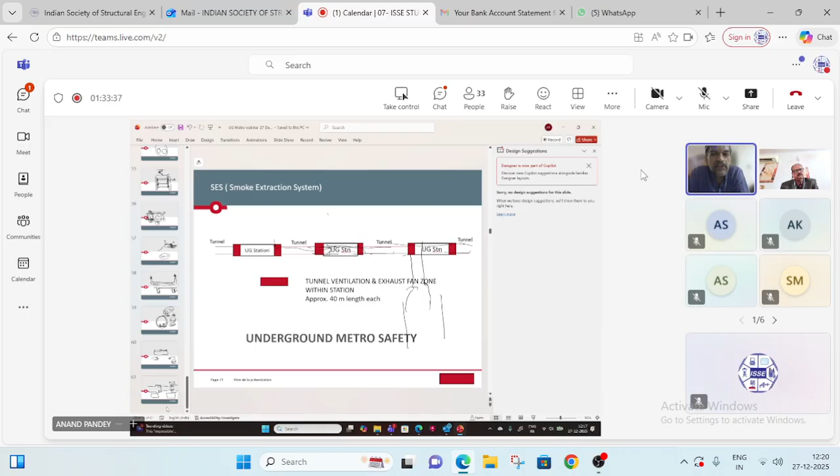There is a next question from Engineer Shikhar Srivastav. He is asking, what are the safety risks during TBM failure?

Safety risk during TBM failure - like in the case of Kolkata, near Bankim Setu. In Kolkata Metro itself, there was a railway track very close by, and the TBM created some problem, and the station was far, so they had to dig a temporary shaft, take the head of the machine out, repair it, relaunch it and restart. That was done.

But fortunately, this was an area where there was open land. Suppose there was no open land, that would have created much more complication.

It happened at one of the stations near North Delhi. There was a Gurdwara close by, and it was a rocky area. But due to vibration of the TBM, there were a lot of cracks in the Gurdwara. It created a lot of hue and cry. The TBM had to be buried itself - they had to leave the TBM, and devise a separate technique to do it from that side.

So if there's a problem, either the TBM is buried, or the TBM head is possible to repair - we create a shaft, take the head out and repair it. The TBM machine is roughly 100 to 150 meters long, but the head is only 10 to 15 meters long. So this 10 to 15 meters has to be taken out and repaired.